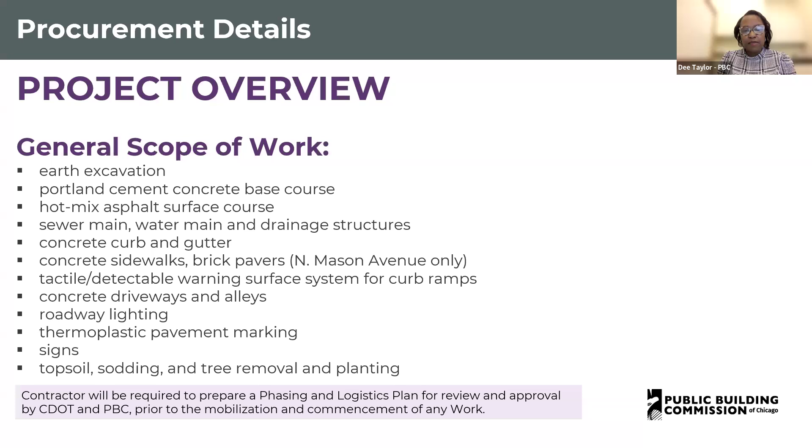The contractor will be required to prepare a phasing and logistics plan for review and approval by both CDOT and PBC prior to mobilization and commencement of any work. Continuing with the general scope of work, the contractor shall also be responsible for providing critical submittals, including electrical lighting, poles and luminaires, sewer and water main, and concrete mix design as determined by PBC within 30 days of issuance of the NTP, notice to proceed.

The project includes City of Chicago Department of Water Management (DWM) lead service line replacement work, totaling 20 service lines at North Mason Avenue, 2 service lines at 56th Place, and 19 service lines at South Hoyne Avenue. DWM requires approximately 2 days per location to perform the work, and their work is anticipated to commence in Q3 of 2025. Upon contract award of the new WPA project, a meeting will be scheduled to review and confirm any and all coordination items, including DWM's planned work activities.

Our time of completion for the project: most importantly, substantial completion must be achieved no later than November 30th, 2025. Scheduled milestones must be completed as follows. There are 2 scheduled milestones. The first is pre-construction, including permitting, construction submittals, material and equipment procurement, schedule preparation, mobilization, and utility coordination. The milestone date is June 20th, 2025, and work may not commence sooner than May 13th, 2025. Again, substantial completion is November 30th, 2025.

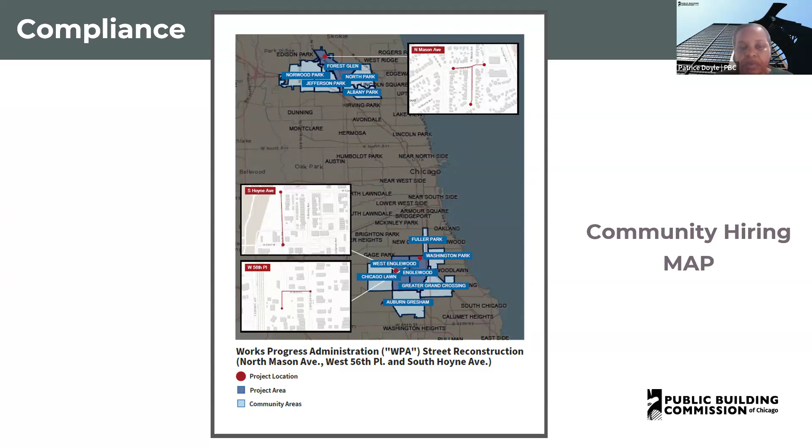We use B2G Now as our payment tracking system. If they are an established business as an MBE or WBE, make sure you check their current certification, because the percentages may change for various reasons.

As an MBE or WBE, they may be an established business, meaning they're in the process of graduating out of the program, and only receive 75% credit for the first year of that process, 50% credit for the second year, and 25% credit for the third year. So if their contract is $100,000 and they're in their second year, they only can receive 50% MBE or WBE credit if they are an established business.

Manufacturers that are MBE and WBE certified firms will receive 100% credit. Suppliers that are MBE or WBE firms will receive 60% credit, and MBE and WBE brokers will receive 0% credit.

You must submit a Schedule D as well as a Schedule C with your bid package. The Schedule D should be completed by the general contractor that's bidding, and this is the credit amount that you will receive for MBE and WBE participation. Again, this should only show the credit amount for MBE, WBE participation.

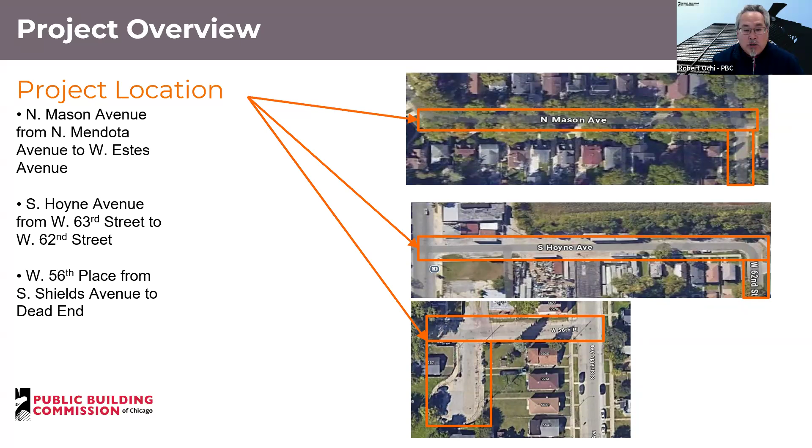Okay, thanks, Robert. This is Jeffrey Orzik with Grafe, and we'll first be getting started by taking a look at Mason Avenue. Mason Avenue is a north-south street, and the south limit is at Mendota Avenue, and it goes north to Estes, with a little bit of work on Estes also. During this overview, we'll be taking a look at the existing and proposed conditions and any local coordination that has to be done.

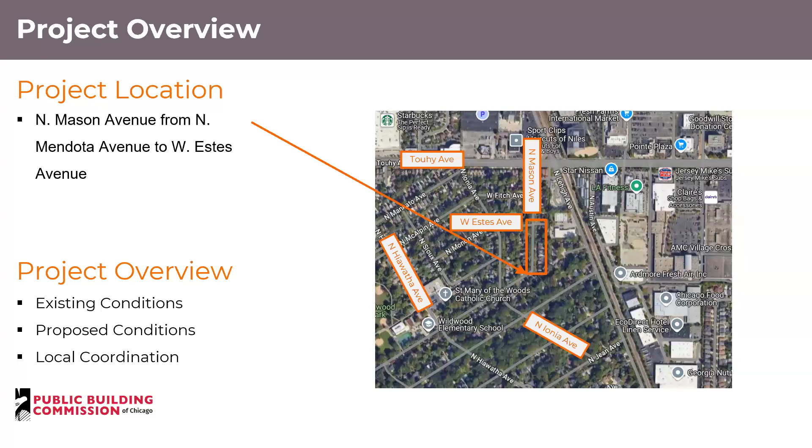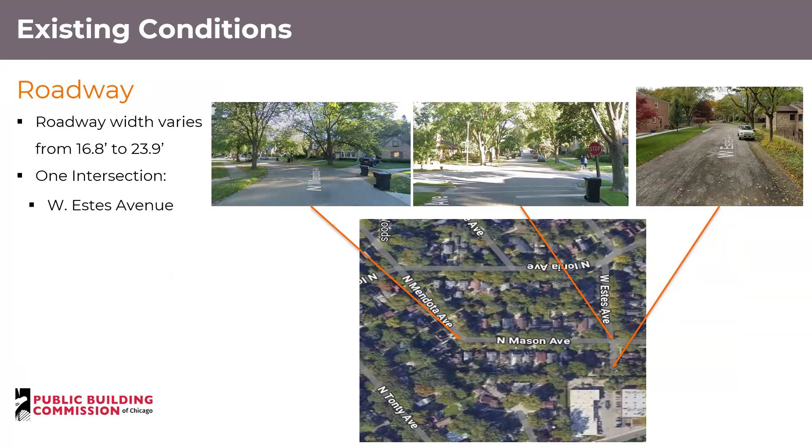The photos here show the existing conditions of Mason and Estes. There's existing asphalt pavement, basically with narrow paving areas from 17 to 24 feet wide, and there's one intersection, at Mason and Estes on the north end of the road.

As we said, there is existing narrow pavement. There are no curb and gutters, and there's also poor paving out there right now, especially on Estes, as you can see from the upper right photo. The lack of curb and gutter leads to a lot of flooding on the street and on private properties, as a lot of the grades are roughly at the same elevation.

The goal for these plans is to widen the road to 28 feet wide and install curb and gutter, and to construct all of the paving, sodding, and sidewalks to drain onto the pavement. We're going to be constructing new driveways and alley aprons, all leading to the water accumulating on the pavement and draining into the city sewer system. We're also going to be installing new catch basins and sewer laterals to connect to the existing sewer.

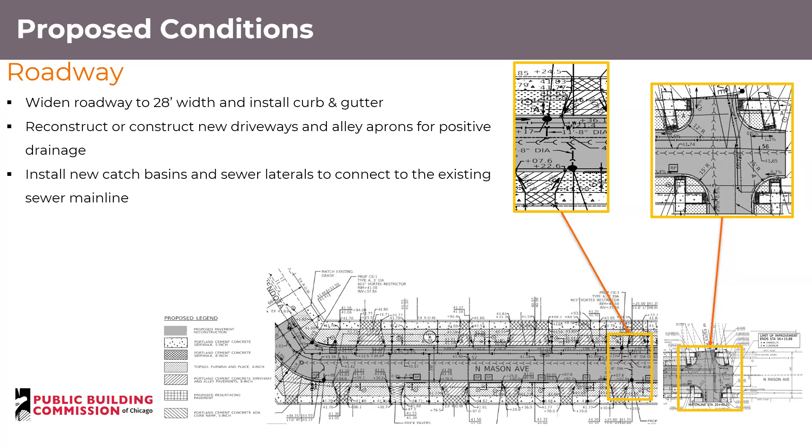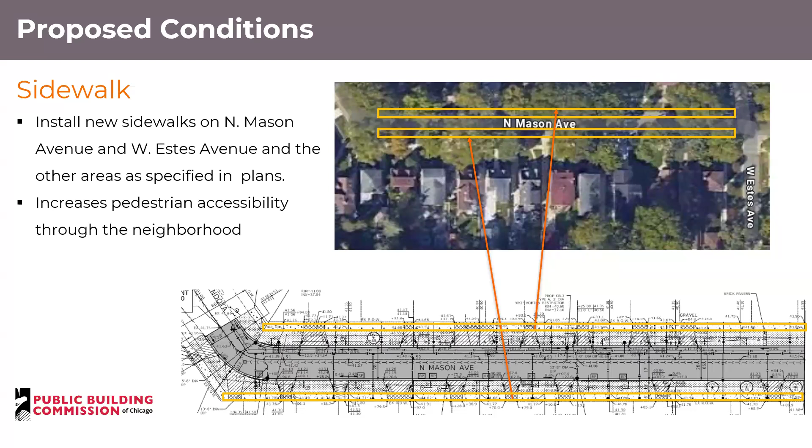We're also going to be installing new sidewalks on the east and west side of Mason, and also on the north side of Estes, as shown in the plans. This will improve accessibility for pedestrians. We'll remove any old sidewalk and provide current ADA required sidewalk. We'll also be making ADA improvements at the intersections, showing current ADA design ramps. This will especially help anyone with ADA needs.

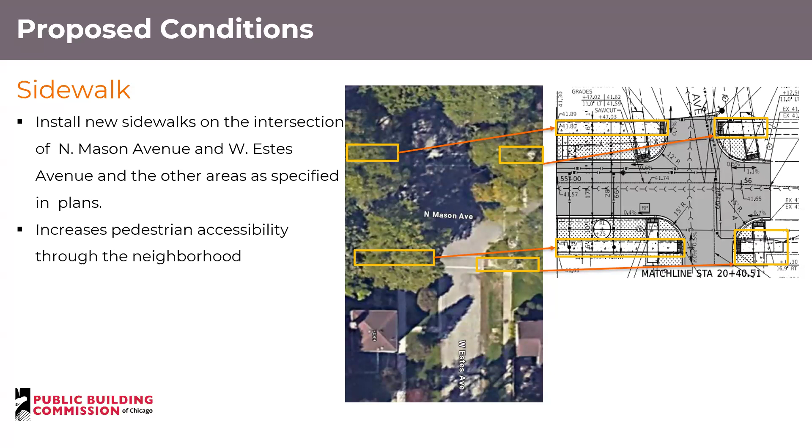We'll also be improving the sidewalk on the north side of Estes, as shown there. The existing concrete sidewalk on the south side of Estes is in good condition, so that will not be replaced. This will all along improve ADA accessibility for all users.

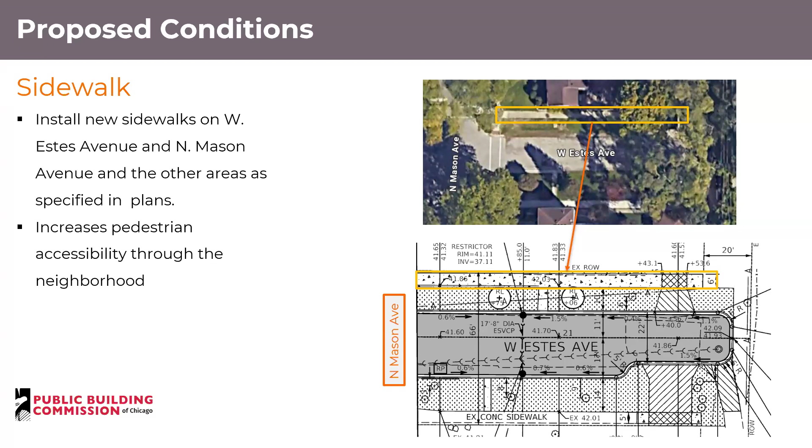For the landscaping conditions, the Bureau of Forestry has instructed us to remove certain trees, and they're to be removed, and 7 new trees will be planted. These will include linden and white oak trees, and also new sod will be placed in the parkways.

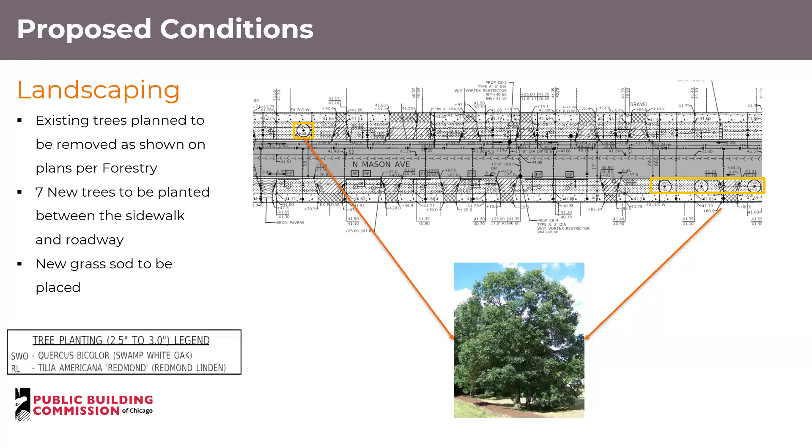The 28-foot street width will allow east side parallel parking on Mason. There will not be parallel parking on the west side of the road. This will allow north-south traffic and 1 lane of parallel parking.

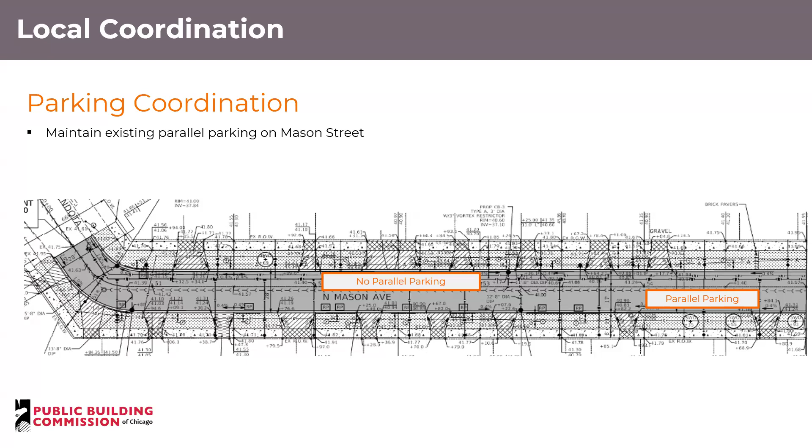Okay, the second street location is Hoyne. Hoyne is a north-south street, and it goes from 63rd Street on the south to 62nd Street on the north end. There's also a little bit of 62nd Street work immediately east of Hoyne Avenue. Again, we'll be taking a look at the existing and proposed conditions, and if there's any local coordination it will be noted.

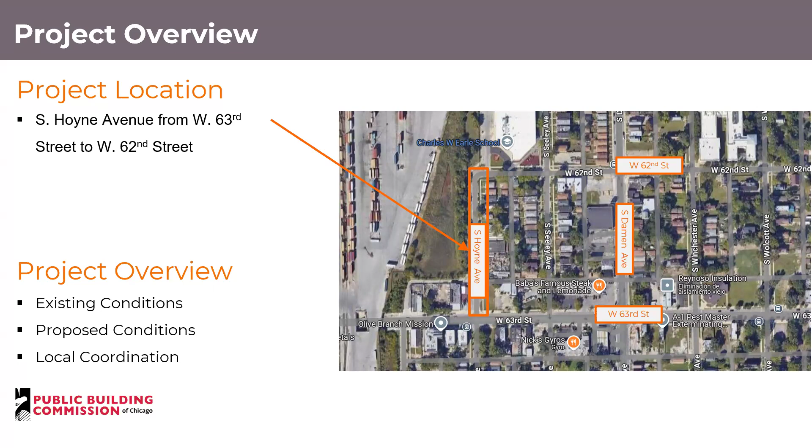We can see that the existing street is narrow, anywhere from 12 to 26 feet wide, and it's pretty narrow. As we can see, there's one intersection on the road, at 63rd Street.

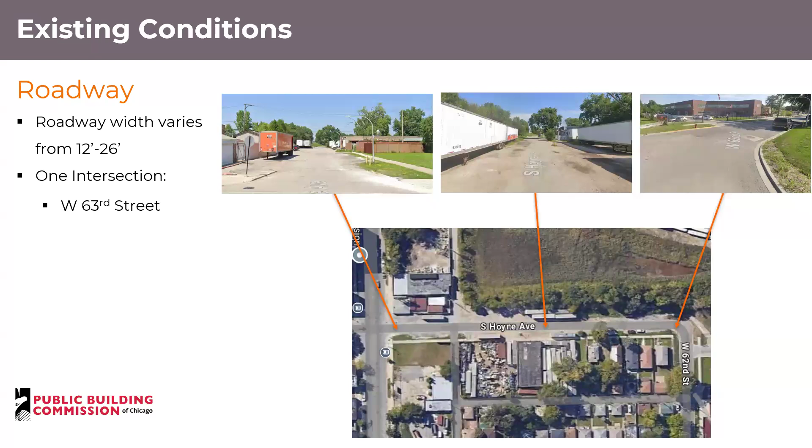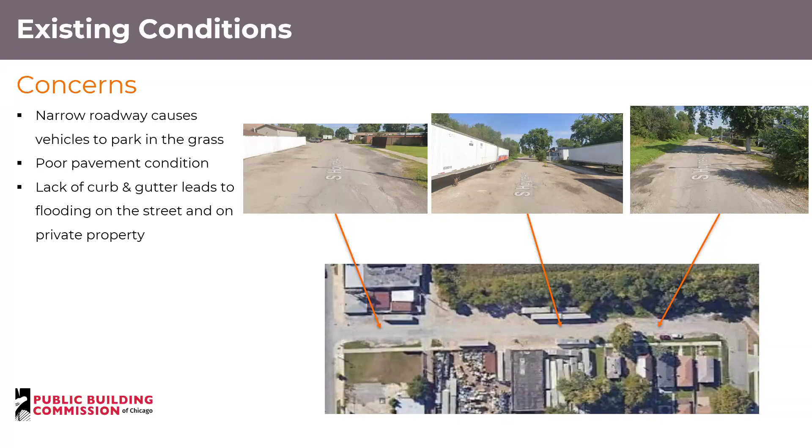The narrow roadway causes vehicles to park in the grass. You can see from the middle photo above, people are using it to park in the grass. The pavement is in very poor condition, with alligator cracking visible in the photos above. Similar to the previous location, the lack of curb and gutter leads to water accumulating throughout the right-of-way and onto private property. Everything's roughly at the same type of grade, and we're going to be introducing new curb and gutter to avoid this.

With a new roadway, we're putting in a 28-foot roadway width, and we're going to be installing curb and gutter with positive drainage from the right-of-way down to the street, to accumulate the drainage within the street and not keep water near the private property. By doing this, we'll also be installing new driveways and alley aprons draining onto the street, and installing new catch basins.

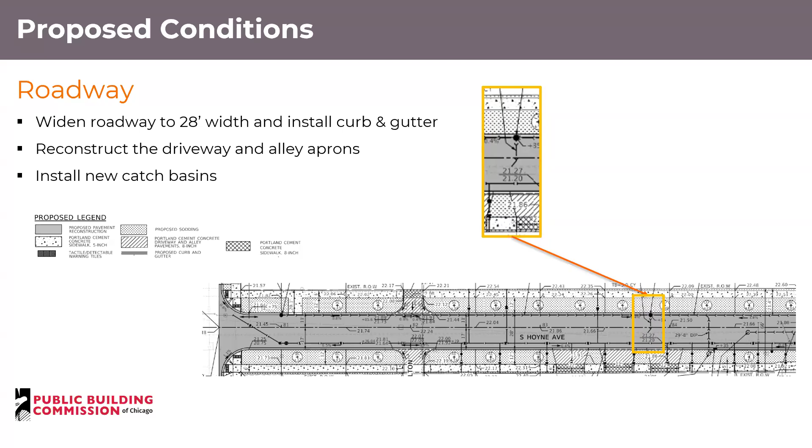We're going to be installing new sidewalks on both the east and west side of S. Hoyne Avenue. This will replace any existing poor pedestrian access that's out there right now.

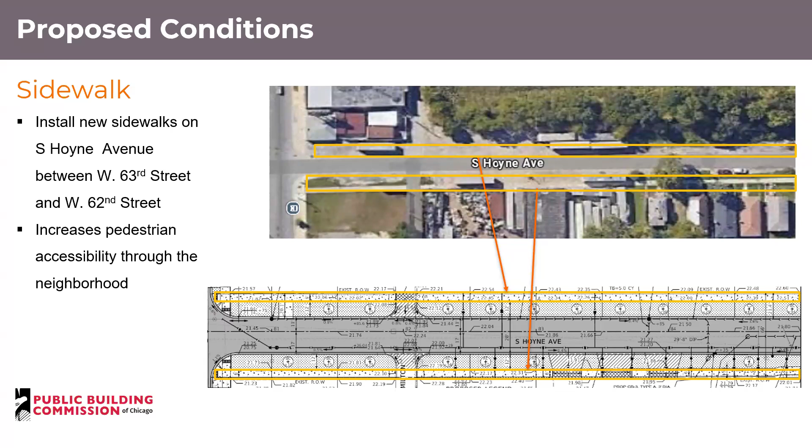We'll also be constructing sidewalks as we're wrapping around the bend from S.Hoyne to 62nd Street, as shown in the plan markup, and this will increase connectivity. We'll also be providing on the east side of S.Hoyne a north-south crossing across 62nd Street.

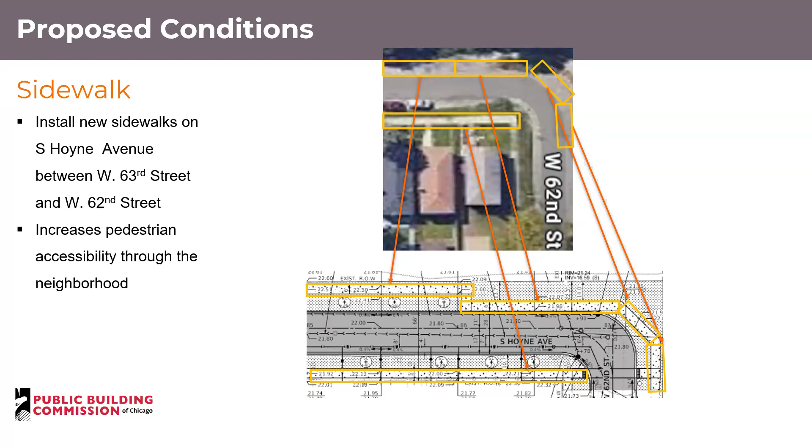The existing photos show very poor pedestrian access right now where it's not demarcated. We're going to be installing ADA ramps and pavement markings to provide access across the road and through the job site.

For landscaping, existing trees will be removed as directed by the Bureau of Forestry, and 25 new trees will be planted in the parkway along with the sod. These 25 trees will include elms, black bald cypress, hackberries, and honey locusts.

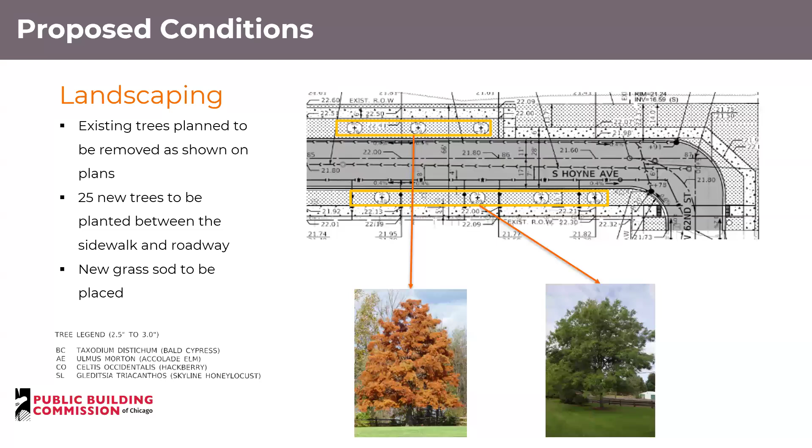On this street, with a 28-foot width, we're going to allow vehicles to be two abreast, and we'll also be providing parallel parking on the east side of S.Hoyne.

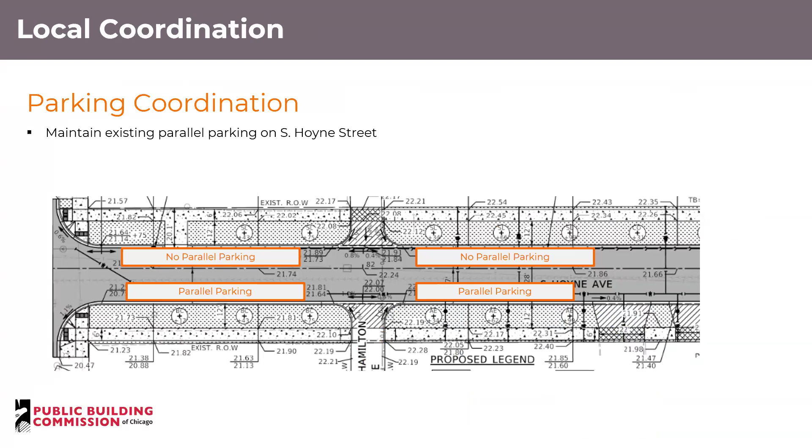The third location is 56th Place, an East-West street from a dead-end cul-de-sac on the west to Shields on the east. We'll be looking at the existing and proposed conditions, and I'll note if any local coordination needs to be done.

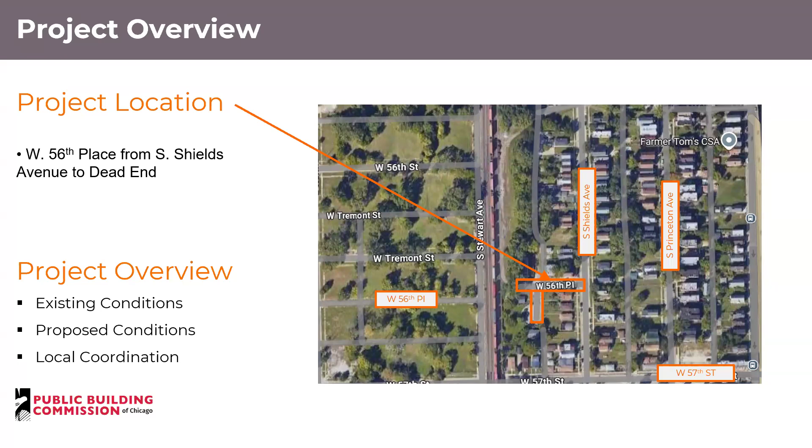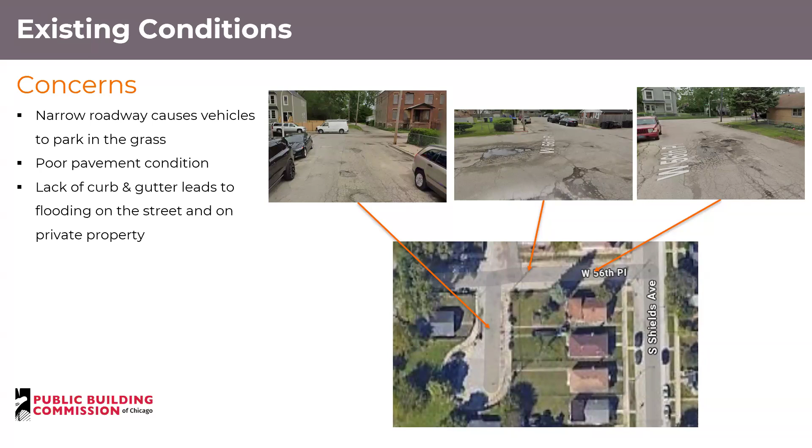We're also going to be doing a little work on the cul-de-sac on the southwest portion with some resurfacing, and also some resurfacing of the Shields Avenue intersection.

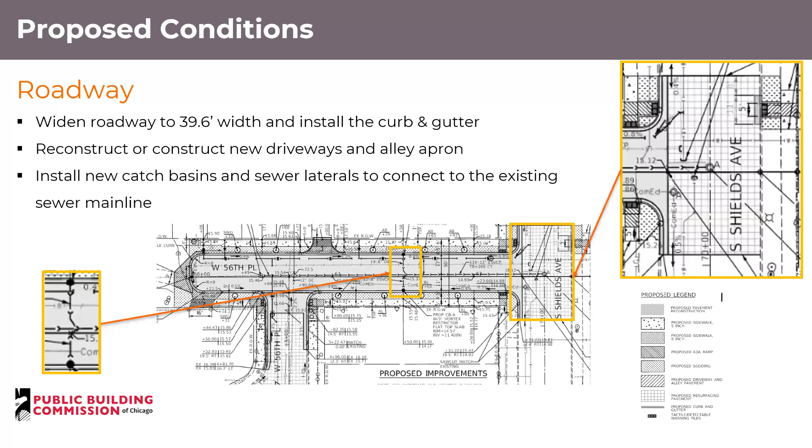There's a resurfacing agreement between CDOT and the Department of Water Management, and the cul-de-sac at Shields is going to be resurfaced, not reconstructed, as shown in these plans.

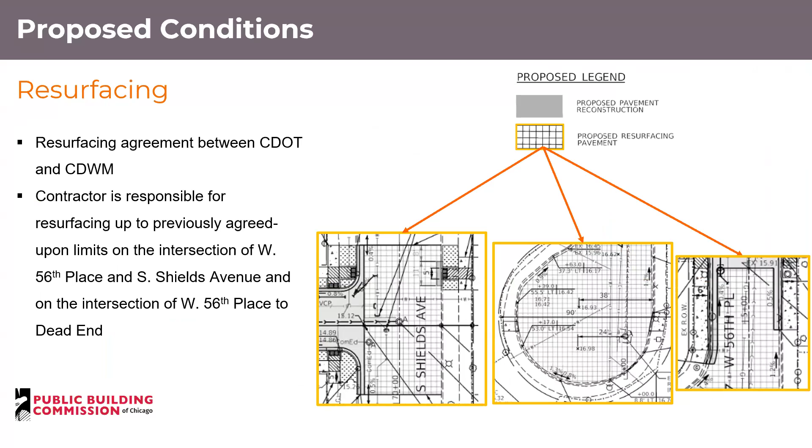The sidewalk is going to be constructed on both the north and south sides of 56th Place, allowing for a much better, modern, convenient sidewalk for pedestrians, especially those with ADA needs.